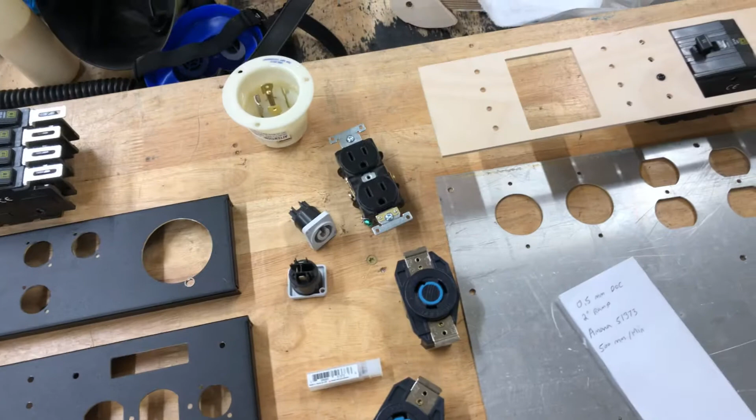And so I was going to fabricate a box out of aluminum entirely, and then I found on a Google search pro speaker parts company.com maybe. They had these panels that were powder coated black, and they are a part of a rack mount unit that's 2U. So I decided to just cut the profile into them directly instead of fabricating my own box.

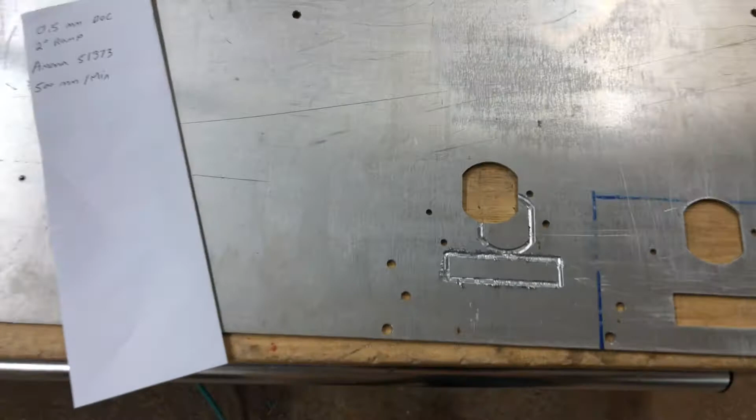So I had set up some of the cuts, and I test cut one out of 3mm birch just to see that my parts were going to fit, and I made a few adjustments. And then I set up a couple of test cuts, and this one right here, I ended up breaking my bit for traveling too fast, I believe, and I also didn't have a coolant.

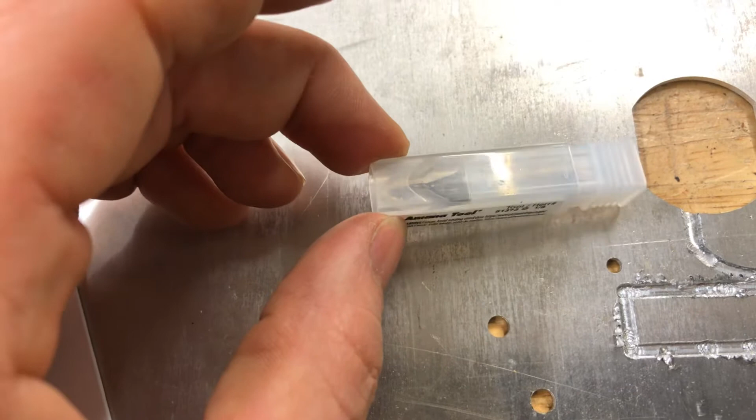So then I was kind of desperate because I only had one bit, and it was a straight flute instead of a single flute, an Amana single flute mirror polish cutter here. This was the cutter that I was trying to use in 1/8 inch, but it turns out that my collet had a burr inside of it, and that burr split the tool while I was cutting. It didn't fail at the cutter. It failed up inside the collet because of the burr.

So I switched to 1/4 inch on this tool in order to prevent that in the future. And I also got a fresh 1/4 inch collet just to be safe. So I did these test cuts here with that smaller tool earlier, but they required this cleanup. As you can see, that's not going to work out.

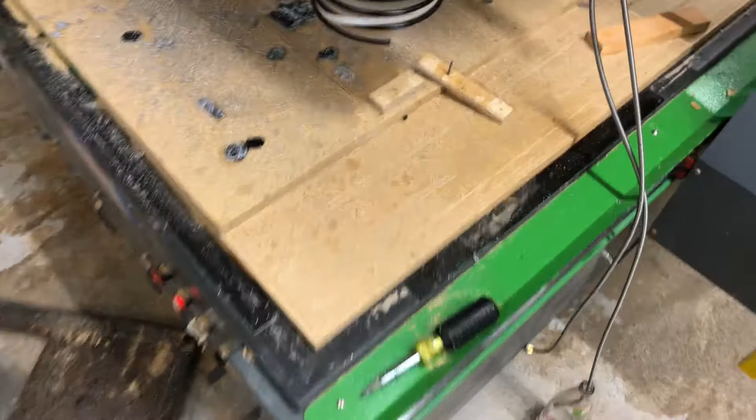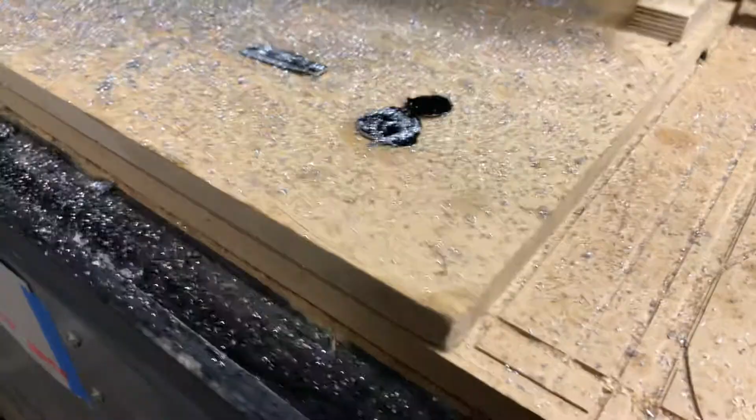So I got some more tools, and I set up on the router. And if you've never cut aluminum on your router, just be sure you're ready for it, because it makes a real big mess. As you can see, some of the cooling fluid got on my spoil board down here, and it's going to swell up. Possibly I may have to cut that one again. But I put this piece of drop on top of it to prevent it from soaking into my larger spoil board.

So this was my setup. I clamped it down. I shot these blocks to this piece of drop wasteboard, and then I screwed the brackets directly to them, and then my work pieces were able to fall out the bottom. Although I didn't penetrate far enough, and it kind of chipped up the paint on the back, which is probably okay.

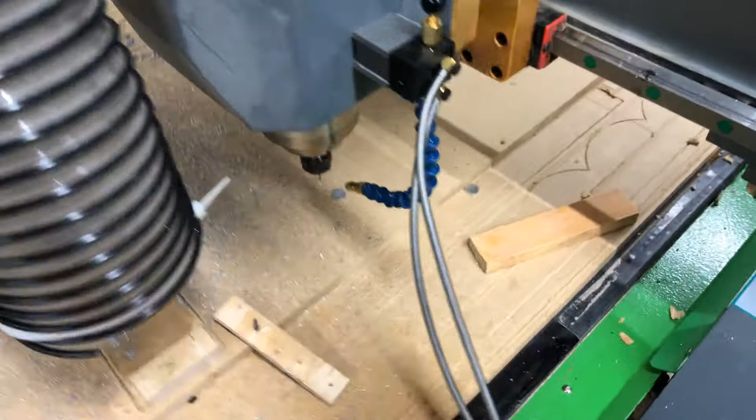I used this soluble oil lubricant. I got it on Amazon. It wasn't anything special. And again, on Amazon, I got this spray lube tool here. It's just a magnet, and I stuck it on the router. This one is really great. I got a cheap $10 one before this, and it didn't work out of the box. And I just used a bottle down here to hold the fluid mix.

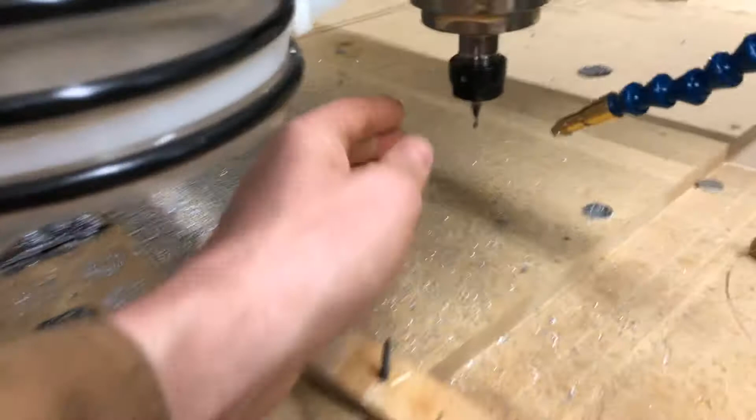I basically put maybe a quart of water in the bottle, and then I poured the oil in until I just felt satisfied. I don't know what the ratio was, but it seemed to work great. It kept the bit really cool. When I was cutting the test piece, it was throwing the drop out, and I didn't really like that. So I tried to set it up so it would fall away.

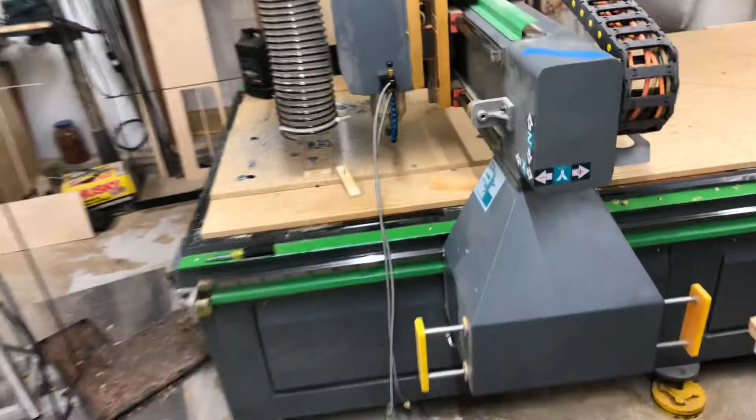You can see the single flute cutter here. I had a hard time trying to figure out how best to set up this cut. My particular router, it's not real easy to adjust the RPM of the spindle, so I was working at full speed, which is 18,000 RPM, and I set up the cut to do a 0.5 millimeter depth of cut per pass, and I set up a 2-degree ramp in Fusion, of course,

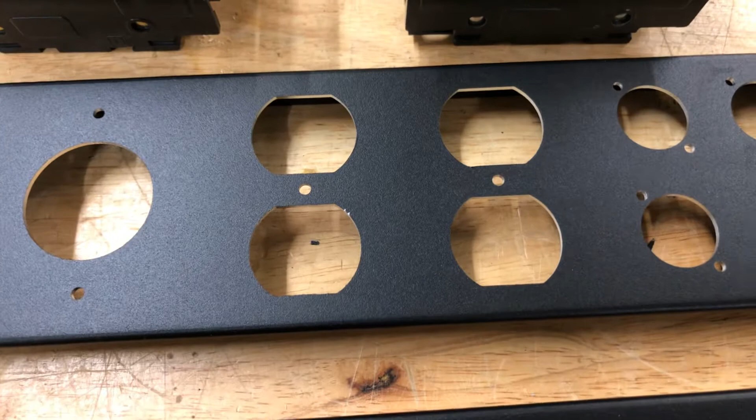and I used the Amana 51373 1/8-inch cutter, and of course you can see I cut these for 5-15 duplex outlets, and then these are the single round. I don't know what their size is. The National Electrical Manufacturers Association seems to keep that stuff secret.

I also had one oops here. As you can see, my cutter dug in there. I had actually had this set up like this, and the cutter came in to make this hole, and I never re-zeroed after this thin test piece that I had cut successfully, and so it plunged right through the piece and tried to start cutting down below here.

So I was able to stop that cut and then flip it over, and this flanged receptacle here is just going to cover that there, no problem. So it'll be a little error on the backside, but it shouldn't affect the final product. Yeah, so that's pretty much it.

I can, sorry, I know this is pretty low class, my cell phone in the shop in the middle of the night, but that's what I got.

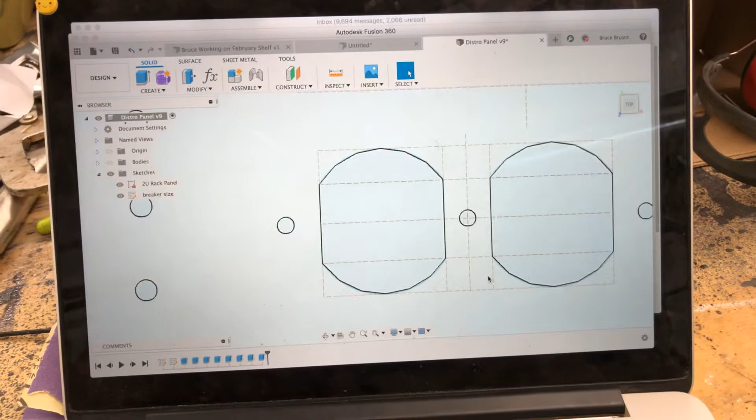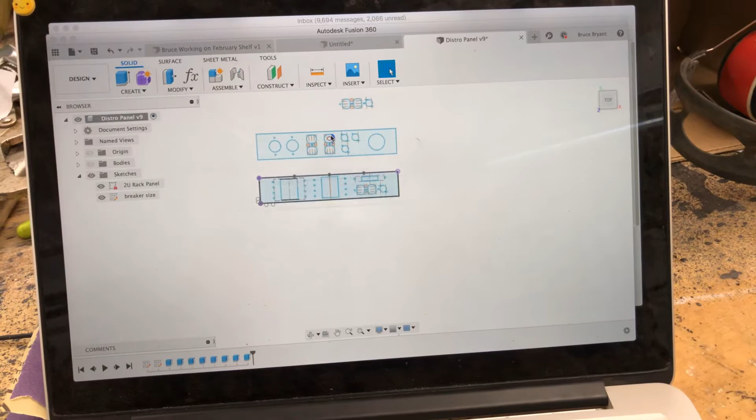So basically, I just set up these sketches, and I made an outlet. I couldn't find the dimensions of the outlet, like the standard US plug, basically. So I had to make it up with just a caliper, and it got pretty close, and I had to make a little adjustment to it. But as you can see here, this is the outline of where the circuit breaker goes, and I just did that layout. And then I did a lot of copy pasting.

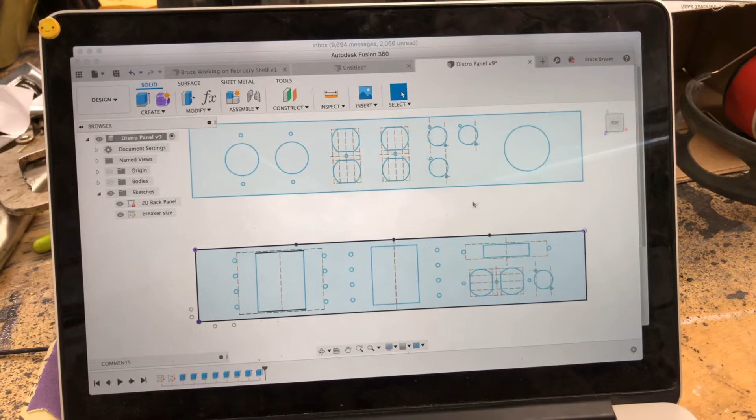This is also a PowerCon D-size connector. Those dimensions were available online, which was really great. And the circuit breaker dimensions from Square D, it's a QOU style circuit breaker that is panel mountable, and it has reversible lugs, which is super great. So this is just a 3-phase 30 amp L21-30 feed for this distro. It's just going to go in an amp rack.

So L21-30 3-phase in, and 240 volts out for amplifiers, and some PowerCons for some little stage boxes and stuff. And again, circuit breakers for all those different things. And I guess it's going to go in this rack here. Yeah, right there. So I'll have another K10 here, and then the 2U distro here, and then 2 more amps above it, and they'll all share power.

So there you go. Hope that's enjoyable. And if you're trying to cut aluminum in the shop in the middle of the night on the router, and you need some speeds and feeds, this has worked for me. I'm not sure if it'll work for everybody. I'm sure you could also go faster with this tool, probably, but I had such a rough start that I didn't want to break any more tools.